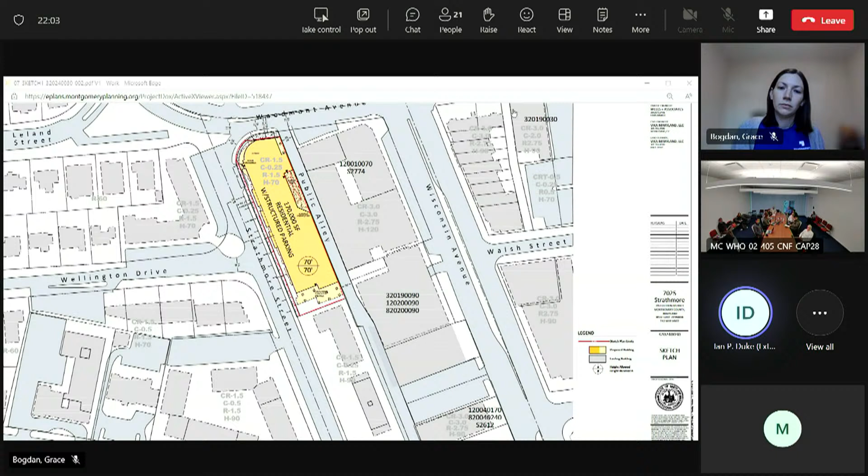We did have several things on the DOT letter that we wanted to bring up as well. The truncation, I'm assuming that means at the corner where the alley meets Woodmont. Well, I think that's what the Strathmore DOT does too, right? Yes. You don't have to truncate at the alley. I didn't think so. No, it would be where Strathmore and Woodmont meet. Yeah, that would be my understanding too. But if we ran both of those property lines out, took 25 feet off, we'd be within that. Can you just show us? Yes, we'll do that.

And then absolutely the same thing we've been doing before with sight lines, showing that everything's adequate so that you can make good decisions as a motorist. Sure.

There was another comment regarding, I can't remember the terminology here, I guess it's on the north side of Woodmont where the diverter is. I think the comment was to make some adjustments to the diverter for the bikes. I don't think we have a problem with that, but initially we had talked with DOT, Matt Folden, and you, Katie, I see you in the room, to discuss the possibility of full movement, which the applicant was interested in initially, trying to gain a little bit more access to and from this site.

I know that's probably going to be difficult, and I know what the sector plan recommends is an enhanced intersection here, with DOT working through the separated bike lanes on the north side, and then the bike share, which is just to our northwest, in combination with the limited turning movements for vehicles. I don't know that there's really much else we can do in the way of an enhanced intersection at this location. That's okay. Ian, I think we just wanted to review it. Yeah, I'm sorry.

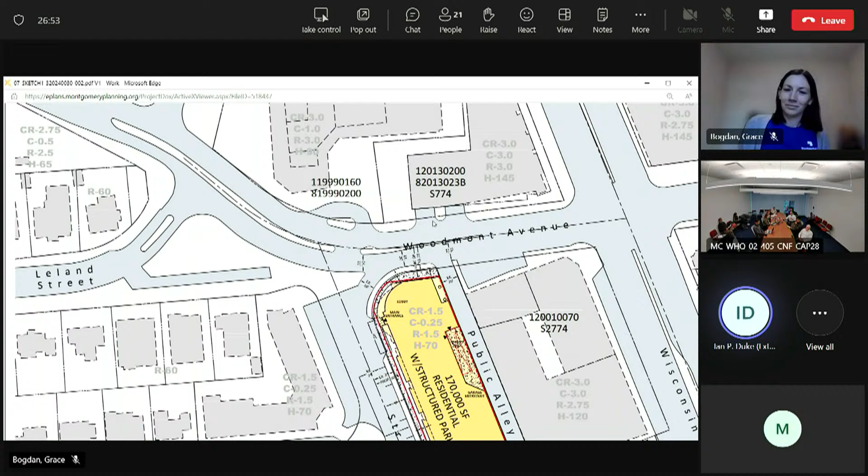Which is why we love sketch plans. So I guess really probably the largest thing is addressing the comments both from planning and DOT regarding the alley width. And then I've got one more thing that we wanted to bring up regarding schedule.

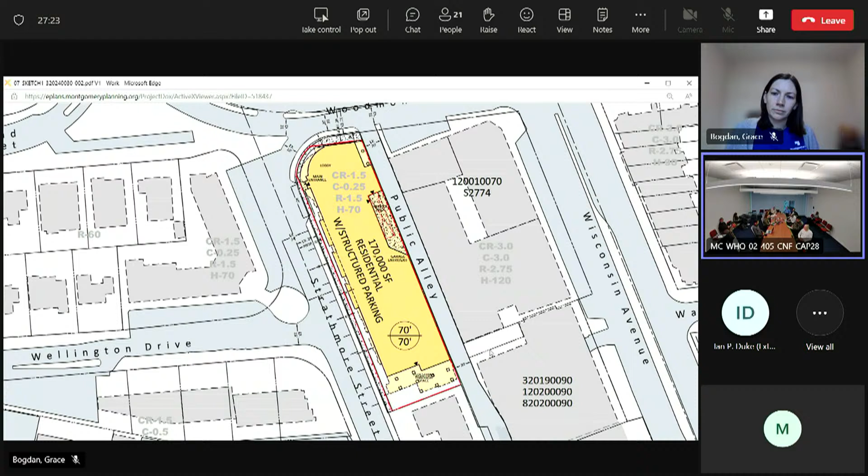Okay, yeah, let's talk alley really quick, and I'll start and then I'm going to hand it off to Deepak. So we have a similar concern. The public alley is 20 feet. You're right, we like the alley in concept, but we want to make sure that this is the safest that we can achieve. We had a similar issue with 7,000 Wisconsin on the opposite side of the street that you guys are linking to with your through block connection. The buildings are right on the 20 feet. This isn't 20 feet with some wiggle room and space. This is truly 20 feet, very tight.

We would like to direct you to do the same thing that 7,000 Wisconsin did, which is they gave an extra like 4.5 feet of pavement. The building cantilevers over, but it gives you a little bit more maneuver space, and we would like to see the same treatment here. So you're effectively widening it along where your access would be so that the vehicles can actually make a more comfortable, forgiving maneuver. Is that fair, Deepak? Is that where you're at?

And also, if you look at the alley right now, the effective width is not 20 feet. That is also a concern. And the way you have the access angled, and this alley being two-way, I don't know how cars are gonna make that yield with 20 feet coming out. And the amount of traffic, this being the primary access, and 7,000 also having a primary access on this alley. This alley is going to see more traffic than usual. So that was a concern.

Sure, and I understand your comments, Deepak. The two things that I'll say about that alley are, it's 20 feet wide, which is the minimum width for two-way traffic. We'd envisioned cars would be coming south on that alley to go into the garage, and then they would be going north out of the alley to Woodmont. That's one. The second was, you'd mentioned other elements within that alley that make movements difficult. It sounds to me a little bit more like an enforcement issue. I don't know that those things are allowed to be in the alley, and we certainly don't control those.

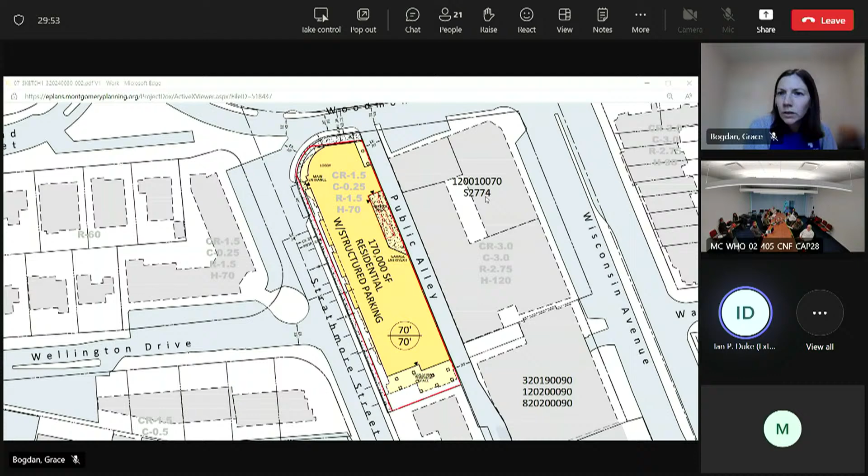I might steal it from Grace first. Yeah, we can certainly look up the plans, but just for us to review and understand what we might be faced with, what floor did the overhang start at for 7,000? Second floor, I can double check, but I think it's the second floor. To understand how much clearance was provided. Katie, do you want me to share? Oh, yes, please. I think it's arch 20.

Sight distance to garage access. I don't think that you can see. The way it's angled, it's gonna be tough to get access. We don't intend to make a U-turn. We intend cars to go out north. Especially the cars coming, there's no way you're seeing. What if they don't want to go north? They have to. Then they'll make a 20-point turn.

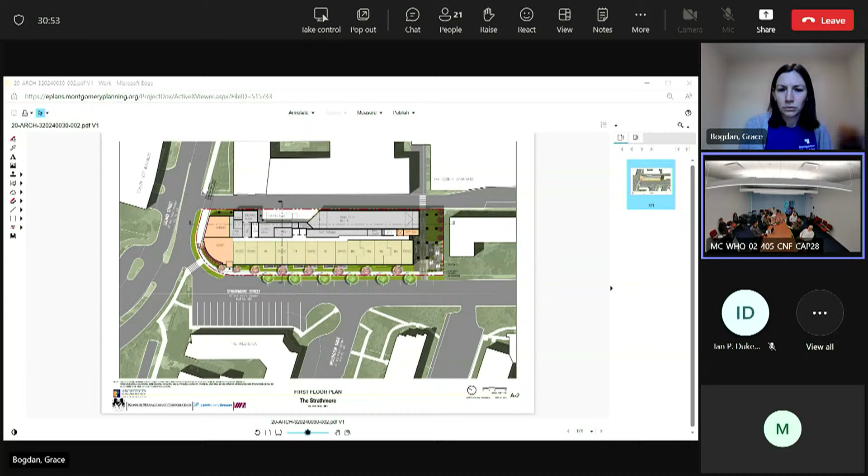Even northbound, how are you seeing the vehicles coming from the other side? There's absolutely zero sight distance there. That angle is not gonna work. Well, we can't turn it 90 degrees to the alley. We do have a truncation requirement even on the garage accesses. You have to truncate on the garage access so you can see. But you're saying maybe you could readjust it to a 90-degree angle instead? We can make it 90 degrees, but it will not improve it. That's why we angled it and just bit the bullet and said, okay, we're gonna bring people in from the north side.

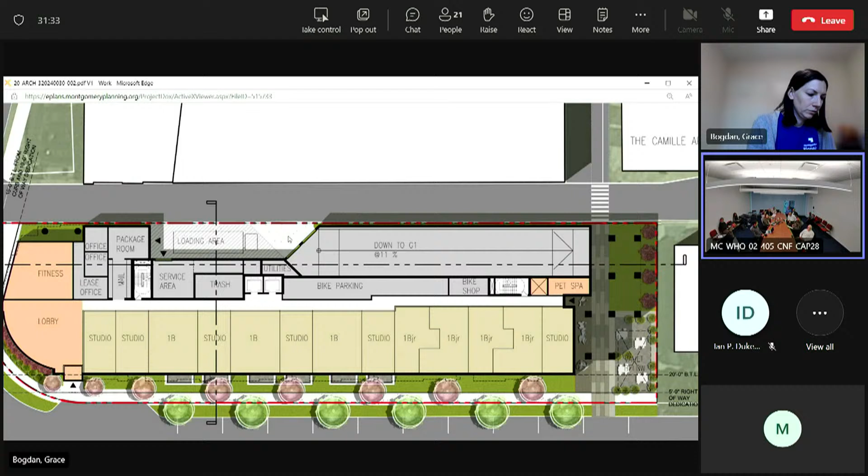Yeah, but what about going up? Same thing. Yeah, leave out to the north. You go up north. If you need to go south, you take Wisconsin. So, I mean, it's not really pleasant to go down south on the alley. Heading northbound. How are they gonna see the vehicles heading northbound when you come out the garage? Your side view mirror. That's not.

I mean, we can have clear sight distance. We can open the side wall of the garage, and that can be just on columns. We'll just fence it off, just make sure it's secure. It doesn't have to be a wall.

That sounds encouraging. Thank you for working with us. I think that sounds good. If we can get a sight distance analysis for that, that would be helpful. And I know that this isn't typically required at sketch plan. We can wait till preliminary plan if that's a more appropriate time. But getting truck turning templates, and I think also Deepak, this is probably why you're here too, has asked for an understanding of how the cars are going to move and volumes and things like that. That would all tie well together.

And then, I'm sorry, one other question. Just to confirm, what design vehicle? Is that an SU30? Is that what you guys are looking at, or what are you thinking? Yeah, something like that. Okay, so let's confirm that as well. I think that'll help with the evaluation. So you need to show the truck going around the 90-degree.

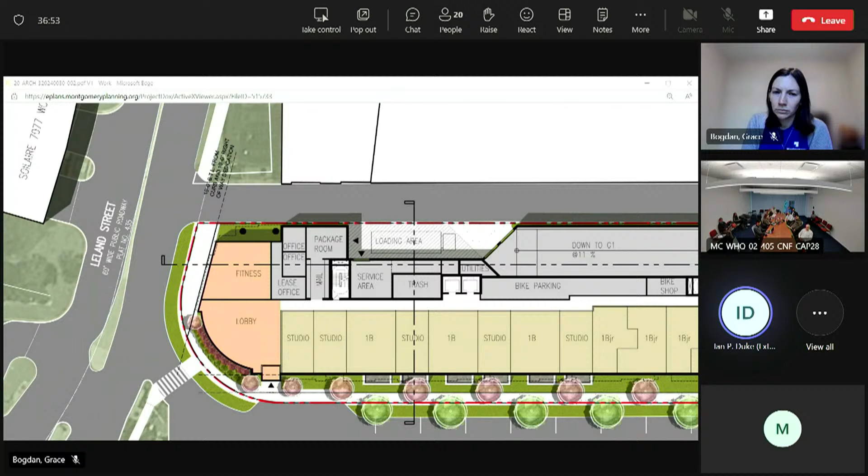Oh, well, so right, so I don't really want it right directly in front of your lobby. It's for everybody's use unless you want to go through a franchise agreement. Well, and I think the other issue too is the functional distance of the intersection. I think Deepak quoted you on what the minimum distance is where we can have parked cars. That is code, I think I mentioned the code as well in there. Yeah. So you cannot have parking within 35 feet of the intersection. The 35 feet from the travelway.

Measured from what point? Measured from, I think it's from the PI. You have to work with Mark on that, how we measure them. It's usually from the point of tangent, right? Usually it's measured from the top. I don't know how they measure. You probably have to work with traffic, how they measure it, where they measure it. It's 35 feet from the intersection.

Basically that one, as well as the street coming in the middle, that as well, not have parking. Right. In line with that. Yes. Some of the parking might go away. Again, that can be worked out at the permit stage or working with Mark on signing and marking, but some of those parking spots. That seems like it's contrary to what Complete Streets says for one of the options for these drop-off spaces.

No, you can put a drop-off space on your property, but what I don't want is it to be in front of your lobby, like we have with the project on Woodlawn Avenue, who thinks that that's their loading space. This is for anybody's use. Right. And it'll be showing short-term parking or something like that. It's not for loading and drop-off, so anybody can use that space.

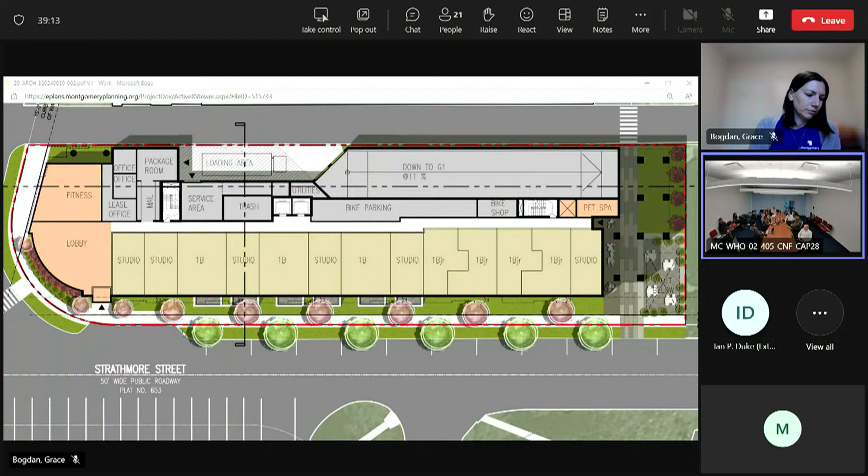You can't use the public right-of-way for your private use, unless you want to go through a franchise agreement. That's where I'm coming from. I think that's understood. Yeah. It's an open space, it's in the public right-of-way. There's standing allowed, but no parking allowed.

I'm just talking about the Complete Streets standard that recommends you have that drop-off zone at the beginning of the block, at the end of the block, or the third alternative is the center of it. So I just want to make sure that because of this odd situation where we're turning right, basically a free right kind of movement, so different than a typical intersection, that we can find where the parking can start safely.

Right? Right. It's determining how far up you can put your parking on that side. So maybe you could look at the sight distance from where the stop bar might be for the right turn and where that sight distance line is.

Maybe that's where you could get your first parking space so that it's in line by the time you hit the tangent. Right. Does that make sense? I think it wouldn't make sense to have 50 feet of curb before you get to the stop bar. Well, and that's probably why Rebecca was correcting me.

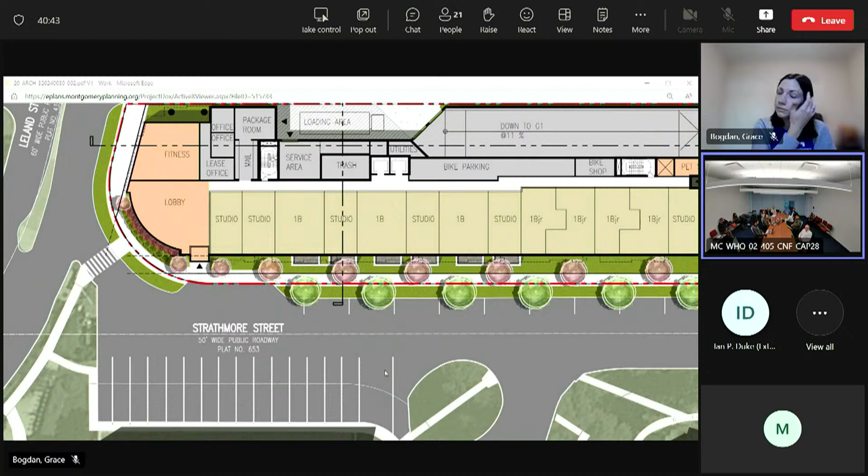So what I recommend, I think you're on the right track. I would reach out to Mark Terry and figure out exactly where it can go. At the permit stage, I just wanted to put it out that there'll be some parking spots. Yeah, so all this parking that you show on your set in the roadway is not approved. It's approved through signing and marking, so if you can remove that, then they will determine where they put parking spaces. We generally don't allow them within intersections.

And you can see here, there's another intersection right there. That's another point that I think Deepak was making in his comments, yeah. So you probably could move it down a little bit, like where your first tree is or something like that. Have it there. Okay. That makes sense. I know we're here at 10 o'clock, just to tick over.

The last question that I had was regarding schedule. If you look at the published sketch plan schedule, it has us doing our final submission on December 25th. I don't know that anybody's going to be around to be able to submit something on December 25th. Is there any float in the schedule for us to be able to stay on track? Please.

Yeah, so with sketch plan, it depends on the project. We hope that there's only one resubmission, not two. But if there is going to be a second resubmission, you would need to do that before the holidays if you want to stay on track, because the hearing date for this one is January 25th. So there's no way that we could push it till after the holidays. We'll make sure we nail it with the first one then.

Cool. Would you like to walk through the schedule? I know it's the juiciest details. Yeah, that would be great. Cool. Planning board date on January 25th. So your first resubmission is due by December 6th, with agency letters actually supposed to be due on December 26th. So that would probably be the most difficult date.

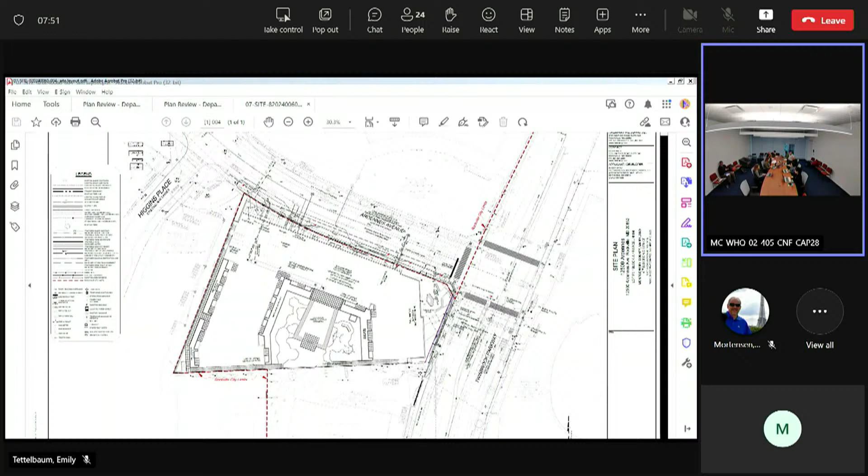So I'd say probably the more time-sensitive comments have to do with the TIS. So I think you all are pretty close to having that finalized. If you want to talk about it here, ask any question, that's probably the most kind of time-sensitive review we're looking at now. So we're happy to answer any of your questions about any of the comments.

Okay, great, thank you. So just for the record, my name is Jane Mahaffey, working with Fairstead on this project. And we have with our team Rob Bernard from Fairstead, who's to my left. You guys all know Matt Gordon. I think online we have Valerie Hockman from SK&I, Kevin Mack from Dewberry. I saw Trini. I can't read all that far away, but it's Trini Rodriguez and maybe Steve from Parker Rodriguez and Nancy Randall

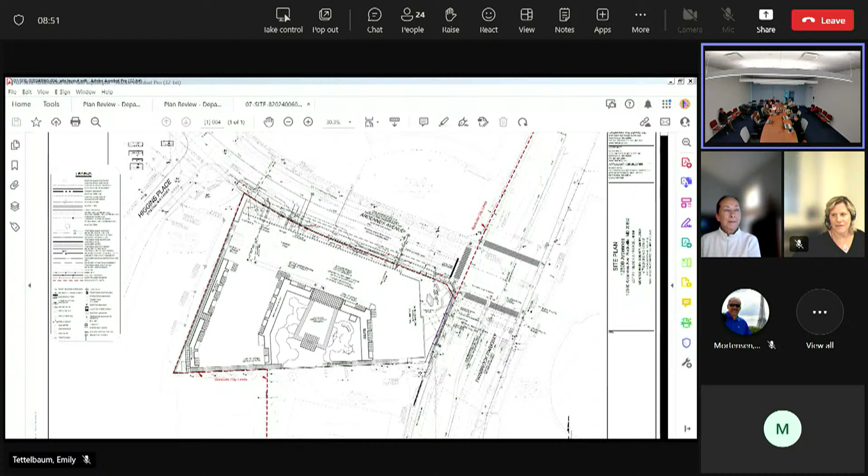from Wells. So maybe since you started with the TIS, maybe have Nancy just give a summary of where we are. We have had some initial conversations with Richard relative to the initial review coming back out and our group. So Nancy, why don't you just go through and ask a couple of questions that we did have relative to that. Yeah, Richard, we understand the majority of your questions that you had. We're going to resubmit that.

The main question I have is based on a meeting that I had recently with NAIOP and staff with regards to Vision Zero. You had asked for some recommendations with regards to the speeding issue, and we were told in that NAIOP meeting that maybe we shouldn't be addressing that in the traffic impact study. So I just wanted to maybe call you back and get some clarification on that if I misunderstood what was stated. I think generally we're in good shape, but if I could schedule some time with you to go over that question. And I think there was one other, and I apologize, Jane, I don't recall what it was. I'm sorry. All right, give me a minute.

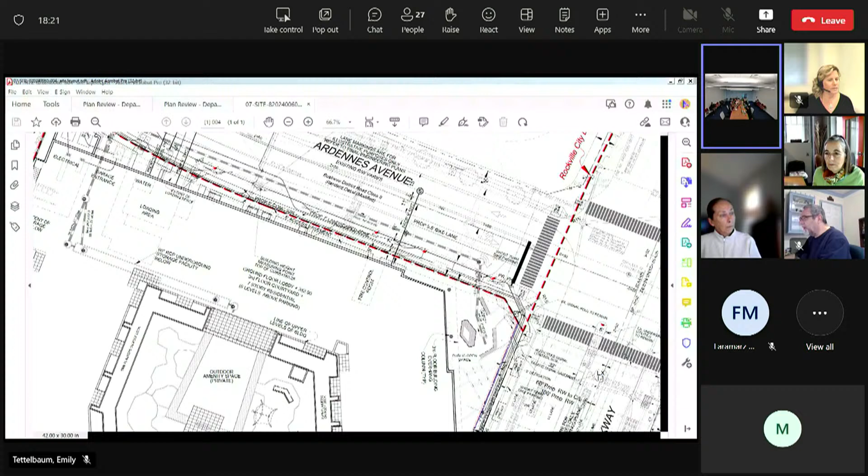I think that 100 feet was like a goal, but you don't have to strictly abide by it. Your suggestion of moving it back so it doesn't conflict with the right turn lane and where the bike lane is merging, we're okay with that. As a matter of fact, if you can show anywhere along your property frontage, obviously as close and convenient as possible is good, but you can move it back from the intersection as far as you need to provide a safe drop off for us. Okay, we're looking to see if we can do that. I just knew we couldn't do it within the 100 feet of the entrance because we have the right turn lanes. So Kevin, do you have any other questions related to that while we have them on the phone?

No, because it's actually 108 feet from the door; that's the end of the taper for the right turn lane. So we would stripe off that portion between the loading dock and the taper, and we'll designate those two parking spaces as short-term loading, whatever you prefer to designate those as.

My understanding was, looking at the plan, and maybe Jim Lapping can help me, I thought based on your exhibit for Ardennes, you would not have any on-street parking at all. And if you wanted to do the loading up to where it says loading and your driveway to the parking garage, I thought you don't have any on-street parking. And if you want to do that, you have to cut into the landscape buffer. Am I wrong on that?

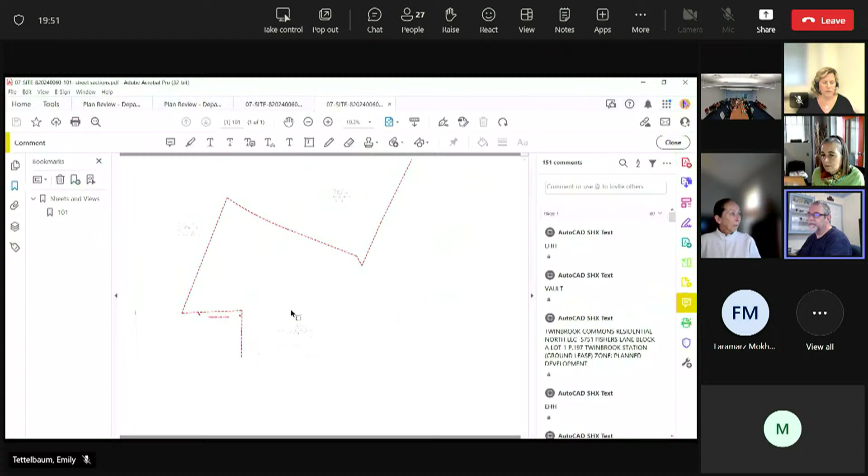No, there's a 7.5 foot wide parking lane against the curb for a portion of the frontage where we don't have conflict with other site elements. So between Higgins Place and our garage entrance, there's room for parking for a few spaces there, and then between the loading dock and the garage entrance, that curb lane is actually part of the fire lane. And then we have space for two parking spaces between the loading dock and the taper for the right turn lane.

And we didn't see the second cross section, so that's fine. If you have room, then it's okay. I just looked at the one, your section BB, and we didn't see any room, and I thought that was your typical frontage. Oh yeah, it's labeled on there as turn lane, and it should be turn lane / parking lane. Yeah. Okay. I see the confusion there. Okay. So that may be able to be satisfied with just a little bit farther back. So we'll show that on the plan.

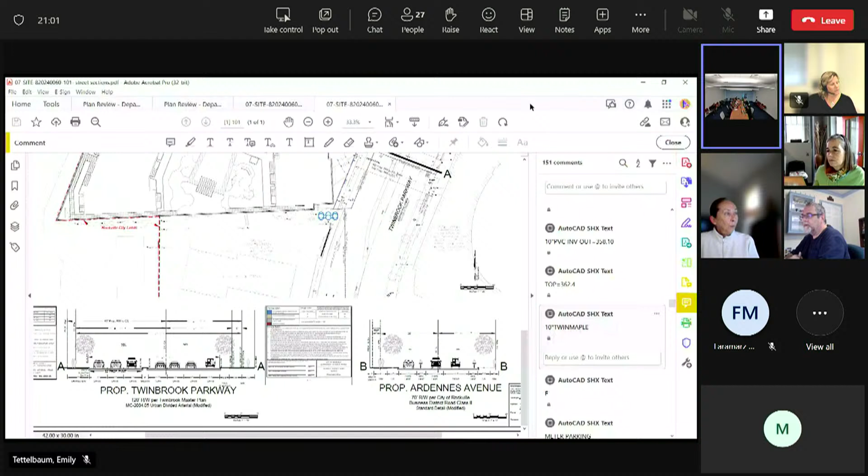And then I think our big one, obviously still to work out, is the trash and loading, but we'll do the turning templates for that to show coming in, and we're tweaking it a little bit interior to help out with the discussion. So I think we'll have something hopefully we can show you in the next round that will satisfy those three requirements. And thank you for the consideration of the 8 foot from the previous project.

Appreciate that. Absolutely. On a side note, I remember we had a development in the city and we had the same speeding issue. And what we asked the applicant, and our mayor and council approved that, was to mount the speed display boards on the side of the road to inform drivers that they're speeding. So that was the mitigation measure that we applied, when it went over the speed limit. So just for your information. Okay. Thank you.

Okay. I think Rebecca, relative to some of the things that were in the previous report, somebody noted a 2019 letter from the last one. We'll just go through that. I don't think there was anything. Twinbrook, you asked for the bike lanes. Twinbrook clearly isn't going to have. Yeah, did you guys pay? The previous owners, we weren't the owners on the last round. The previous people had a pay in lieu for the bike lane. So I think that's probably going to be the only way we're gonna satisfy that one.

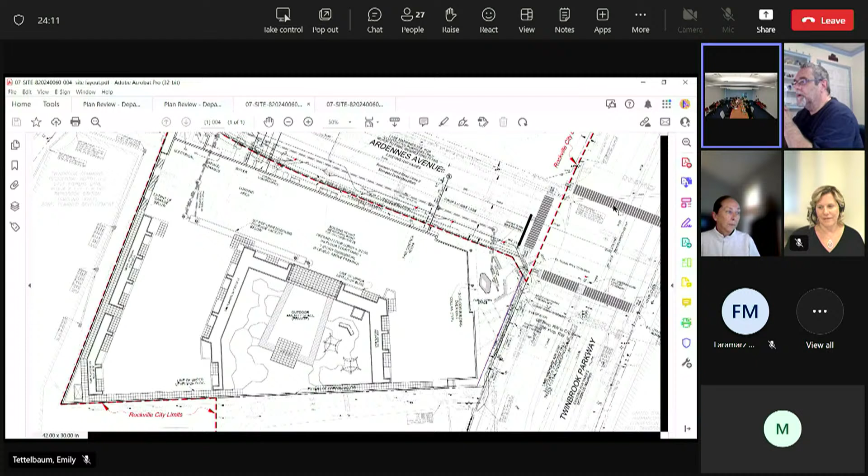So you can't have steps, or is there an easement there too? Where? Along Twinbrook Parkway? Does everything fit within the right of way or do we need an easement? We've designed everything to be within the right of way. But that doesn't have any space for the bikeway, is the problem. But the sidewalk, anything that's required to be in the right of way, that's public. Yeah, the 8-foot bike shared space sidewalk. The 8-foot sidewalk and the 5-foot tree pit are within the right of way.

We are showing a 1-foot PIE. You're only getting minor species, simply because the sidewalk is right on the right of way line. Because anything less than 6 feet, we can't put major species trees in. I don't know what trees they have proposed there. Trini or Kevin, do you know what trees are in the Twinbrook Parkway lawn panel? Hold on a second here. Let me grab that.

We're having them do an amended soil in sidewalk. This we have with Parker Rodriguez: we have American elms, hybrid elms, which is a big tree. I want to talk about that because I don't know what the speed limit is on Twinbrook Parkway. Is it 40? Nancy, do you know what the speed limit is on Twinbrook? I thought it was 35 there. Yeah, I believe it's 35. Okay.

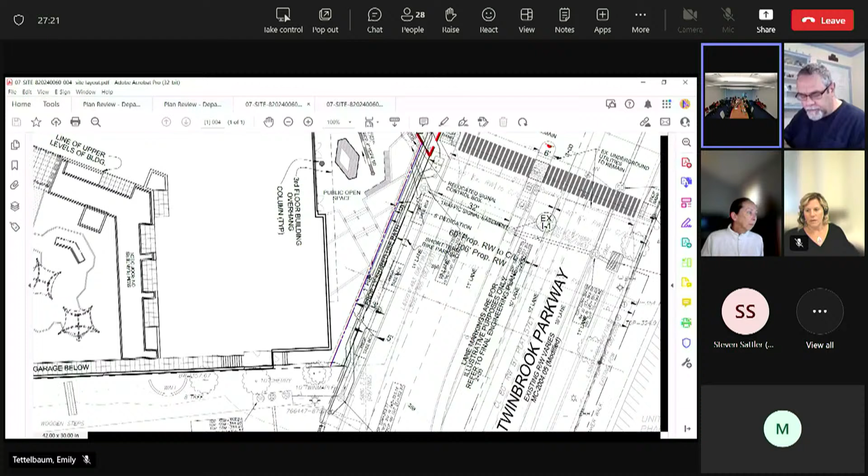Is that why Sam Farhadi said he wants us to follow the 1992 Bethesda streetscape standards? Different issue. Sam's not on today, I think he's away, but I heard from him yesterday and he said it's because those streetscape guidelines have an amended soil panel under the sidewalk. That's correct. What'd you say? Amended soil panel is the correct way to do it. Right, under the sidewalk.

Yime, do you know if we allow the major species trees in a 5-foot tree lawn? I think that will be at the permit stage and the tree guy will review it, but it doesn't matter which one, they need the soil panel. Okay, and if you're following the panel, that's 5 feet, so you should be able to put the larger trees, because the soil goes under the sidewalk. That's the whole point. Depending on what the speed is, you need more buffer so vehicles don't run off the road and hit the tree.

Okay, so where do we learn this? She said at permit stage, I think, right? But we need to get it nailed down. Can you provide some guidance on what you want? At this point, it's whatever you guys want, isn't it? Sam's out, we can determine when he comes back. Okay, and if you just want to tell us what tree you want, we'll put it in. I don't care, I'm not going into that. I meant if you want the smaller or the larger. I know that there was something like 4 feet and 40 miles per hour that we wouldn't allow. So I don't know.

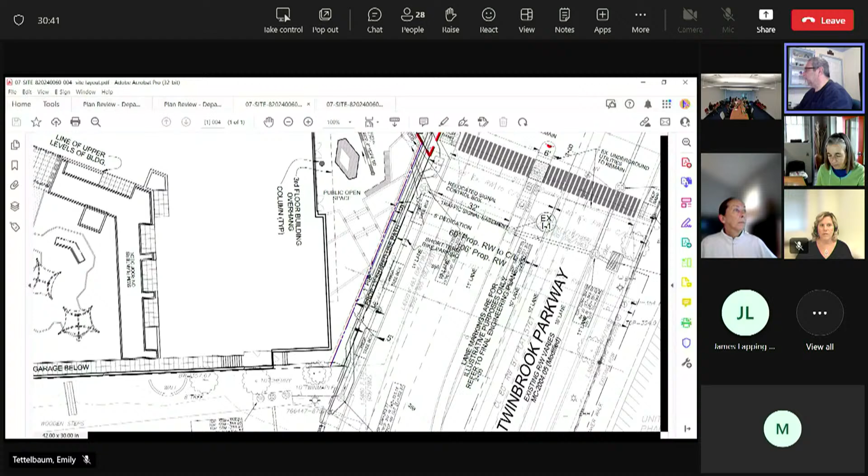I'm okay unless they have questions. I think it was pretty straightforward. I guess the only question I would have on that is you want us to take the pipe coming out of the garage also straight across the road? Because we basically have two pipes that are creating the parallel system. One is the drainage from the courtyard at the intersection, and then the other one is the drainage from the

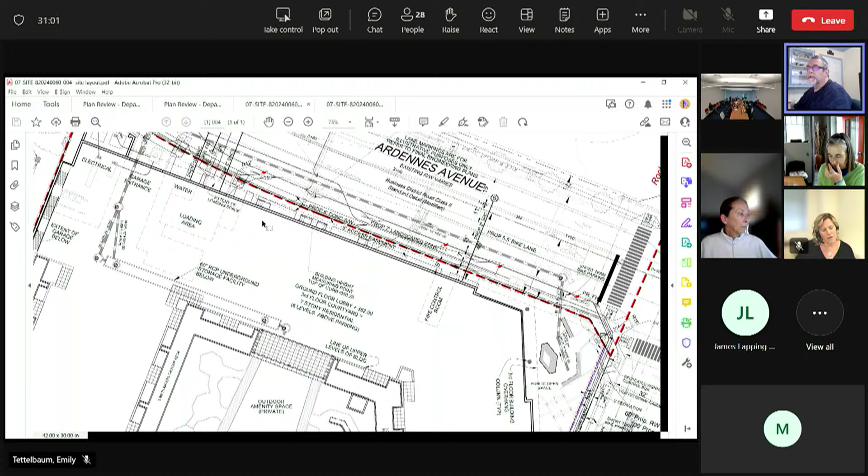building itself. One of the issues we're running into is that the storm drain system in Ardennes is very shallow, and it's inhibiting our storage volumes for the stormwater management. So I would need to look and see what the depth of the pipe across the street is. I haven't. That's fine. If you can provide justification to provide a parallel system, that's fine. But okay, just looking at it, I thought it could tie out.

And so if the stormwater vault, the pipe coming out of the garage is lower, I think going down to the inlet you proposed, the existing inlet I2 would be fine, since that's probably close to the same distance as crossing the road. It would really just be the long run, running parallel from I guess the south part of the development.

Sure. Okay. All right. And I don't believe that the drainage from the courtyard would be an issue for getting into the pipe across the street. Okay. But we'll have to take a look at that and make sure all the inverts are working in our favor. Okay, sounds good. All right. Yeah, that's easy. We'll deal with that one.

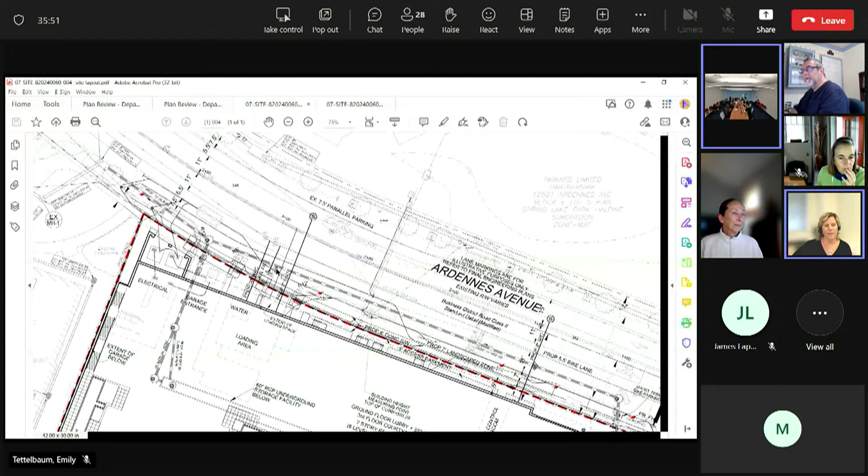Yeah, proposed back in 2019, so I put them side by side, and there was more fenestration, Valerie, on the previous elevation on that corner, especially on the northwest corner. On the northwest corner, there's a blank wall where your electrical room is. Right. That is very exposed for pedestrians walking on the sidewalk. So that's the side where I think previously there was some fenestration, but now it's completely blank. So if it's feasible to have fenestration, it's better.

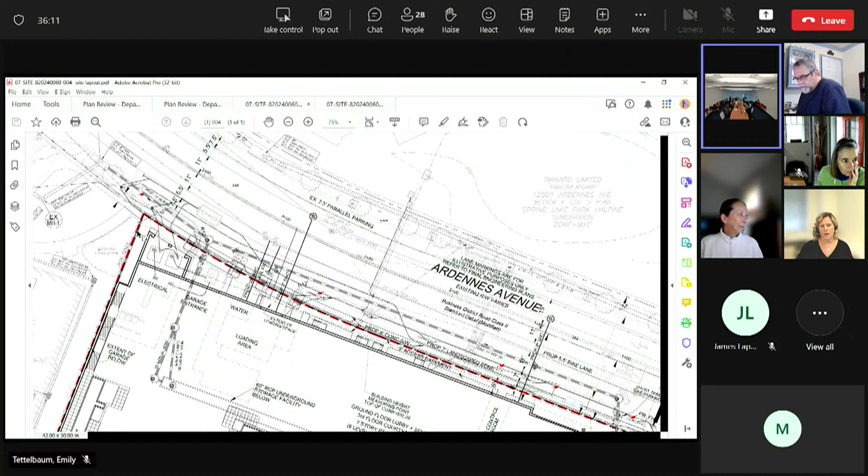If not, some sort of artistic, like a brick pattern or whatever you guys come up with, should solve the problem. Yeah, I think we're leaning towards more brick pattern or some kind of relief, like in and out kind of. Yeah, so if you give us a little detail rendering for that corner, we can take a look at it. Yeah, we're going to try to solve it in a way that doesn't cost more money.

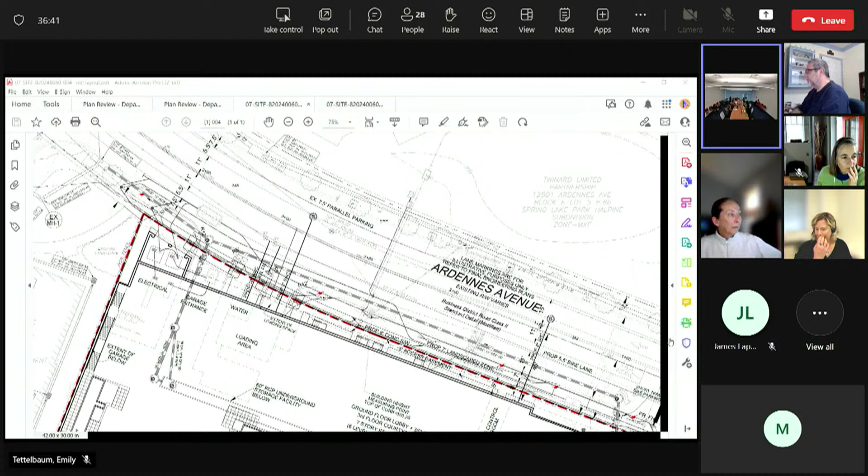Sure. All right, we need to wrap up. Yeah. Good. That was my last comment. Great. We'll just coordinate with Emily on our submission. The updated TIS is going to go in quickly, but the rest of it, we may just try to make one clean submission before December 26th. Okay. We'll talk to you about that. Yeah. Sure. All right. Thank you, everybody. Great. Thank you.

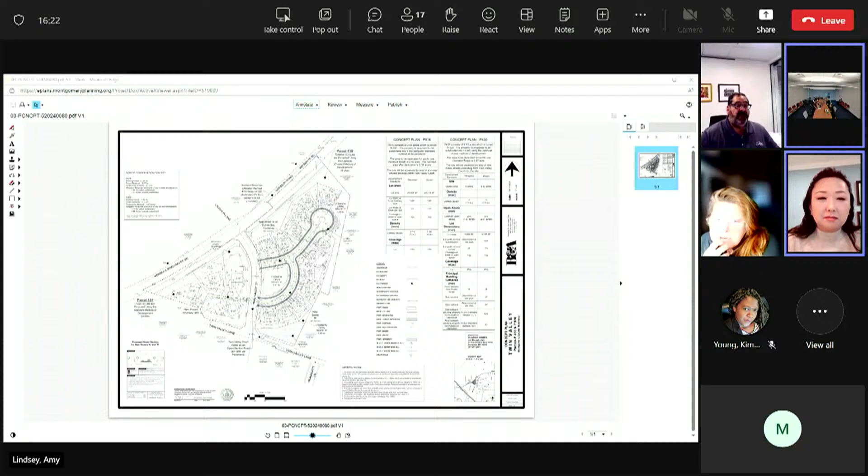Well, I've got the plan up, but I was waiting to hear from Christina. Can you guys hear us now? Can you hear us? Yes, I can hear you. You can hear us now. Who can hear? Can anybody hear? I can hear you, Paul Mortensen. Okay. And Amy, can you hear us? Yes, I can hear you now. Oh, okay. So it was a glitch. Okay, so we can start again. I guess I need to start again because I'm not sure what the auditorium heard.

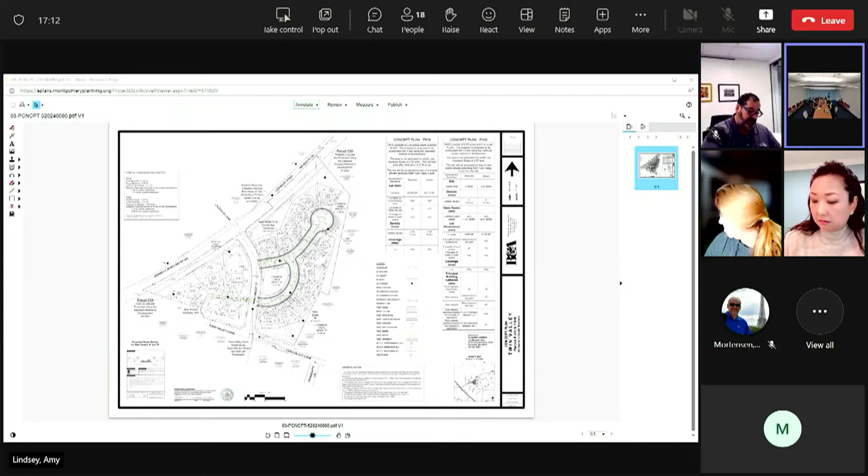I am Christina Sorrento. I'm the Chief of the Intake and Regulatory Coordination Division, and this is the DRC meeting for Twin Valley. Your lead reviewer is Amy Lindsey, and she's going to highlight any of the major issues, and then we'll turn it over to the applicant. This meeting is being live streamed and recorded. Go ahead, Amy. Thank you. So just to highlight a couple of the main issues. The first is that you are proposing to use the R200 cluster method on the northern parcel.

I do not recommend this for a cluster method, because the cluster method in this zone is really for the preservation of environmental features or the creation of open space. And while this does create open space, the vast majority of it is not usable and is just located between two houses. Additionally, it doesn't meet the minimum retention requirements in forest conservation law. So it really doesn't meet the intent of the R200 cluster.

There are also, if you look at our transportation planner Richard Brockmeyer's comments and DOT comments, we tried to be comprehensive, but they talk about all of the frontage improvements, which is one of the major questions you were asking, because this does have frontage on Norbeck Road, on Twin Valley Court, and then on Twin Valley Lane itself. There are a lot of frontage improvements that would be required. So with that, I'll turn it over to the applicant.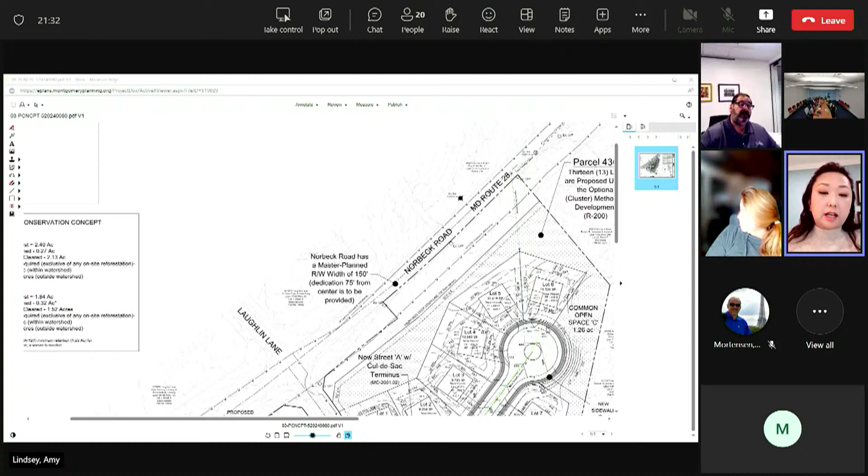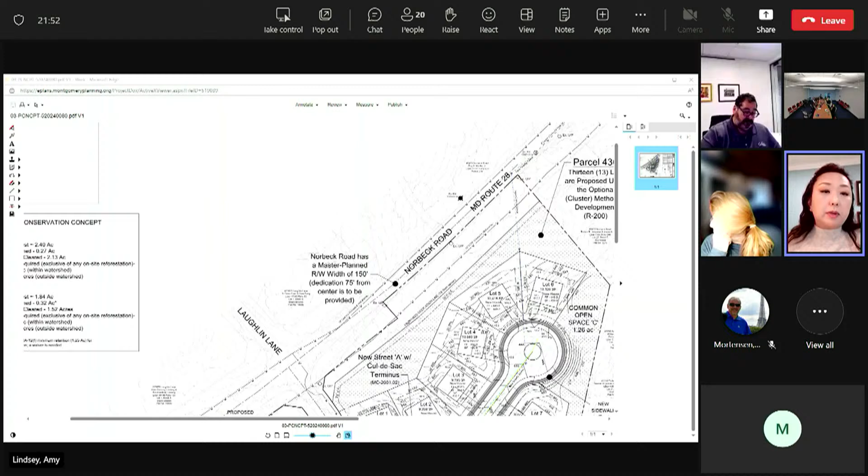And so I'd like to get a better sense of Norbeck Road. Can we show the plan a little bit? The reason we did the cul-de-sac, my understanding is that there really is a significant grade change from the site up to Norbeck that wouldn't make another secondary connection, aside from the existing Twin Valley Court, really feasible for this small project. And so we really think that the cul-de-sac is the only option to yield any type of feasible development on this property. So maybe we start with that, to understand if that is something that we can work with.

I would agree that the grade here is substantial, and that is creating some issues, and it's unfortunate because this is the portion of the property that is forested, whereas the portion up here is not forested. And so the forest is where you would more likely want your development to go. But I don't think, correct me if I'm wrong, that changes the requirements for frontage improvements along Norbeck Road.

Okay. For Norbeck, from what I see, the master plan calls for a bike path on the other side, so we weren't expecting anything on our side, I guess. Per the Complete Streets Design Guide, I think it's a boulevard, if I remember rightly. Right. There are frontage requirements. There is a planned side path on the opposite side of the road, but there's still frontage improvements that would be required on Norbeck on this side as well. I believe I put them in my comments. Let me pull that up. The tree lawn. Yeah. Sidewalk, right?

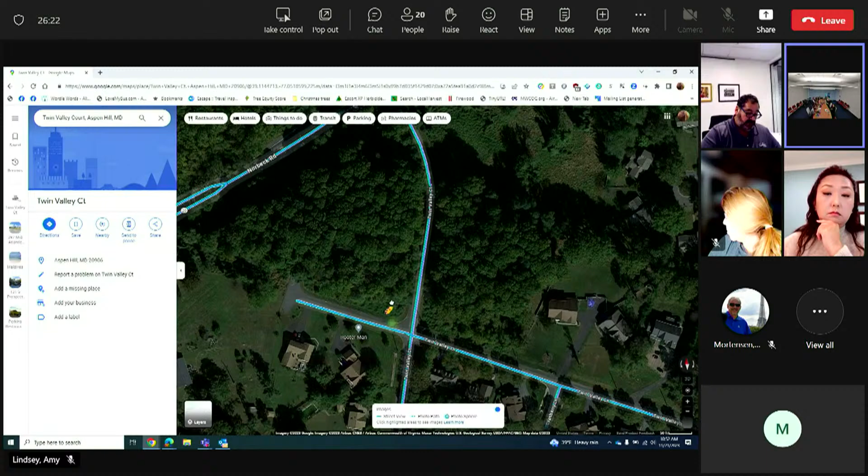So maybe get back to the 74-foot right of way we were talking about. So the interesting thing was, complete streets really doesn't address open section roads. So when we ask for a wider right of way, it's usually to accommodate that swale and then the sidewalk. Some places they haven't put in sidewalk; I don't think this is the case where you wouldn't put sidewalk on both sides of the street. It could be potentially 74 feet. It is reduced from the 78 feet, which is basically a secondary residential street open road section.

You can go back to the 2000s, the 1000s standards that are on the website to look at the swale. The swale, you have a 2-foot flat bottom. We need a shoulder of some sort. I'm not sure if it's paved, like 1 foot paved and then a 1 foot grass strip. And then the 74 feet is proposing a neighborhood yield street, and that is with parking. And so Marie would have to agree to that neighborhood yield street. It's basically what you can fit in within the right of way. And then you have to accommodate stormwater management. Right.

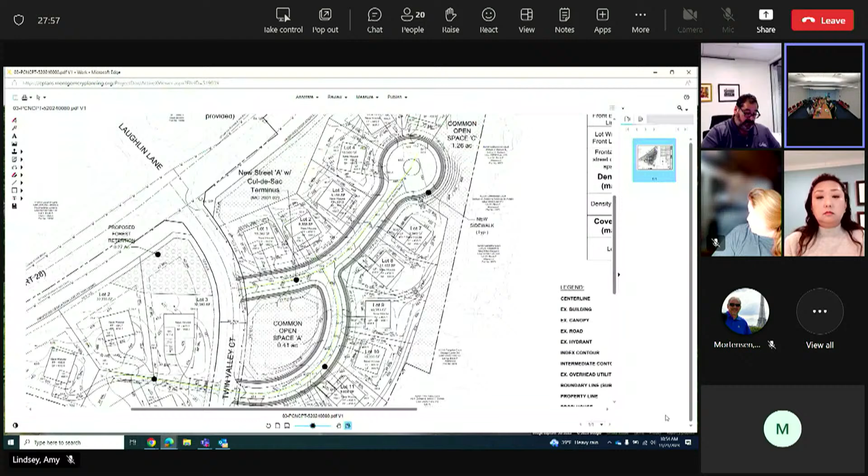So the parking is maybe on one side of the street, or maybe 28 feet of pavement is what I was coming up with, and 74 foot. Yeah. So if you look at the standards, they don't show parking. Yeah, 78 feet, and let me look at the 74 one. Okay. So the 74 one is without the parking. It's just 2 lanes. So it's 20 feet. So if you need parking, you're at basically 28 feet. Yeah, so it's kind of weird. We'd have to look at it again because the neighborhood yield street is to prioritize parking. So it would all depend on if Marie would allow that kind of street, and if not, then you'd have to go to a wider street.

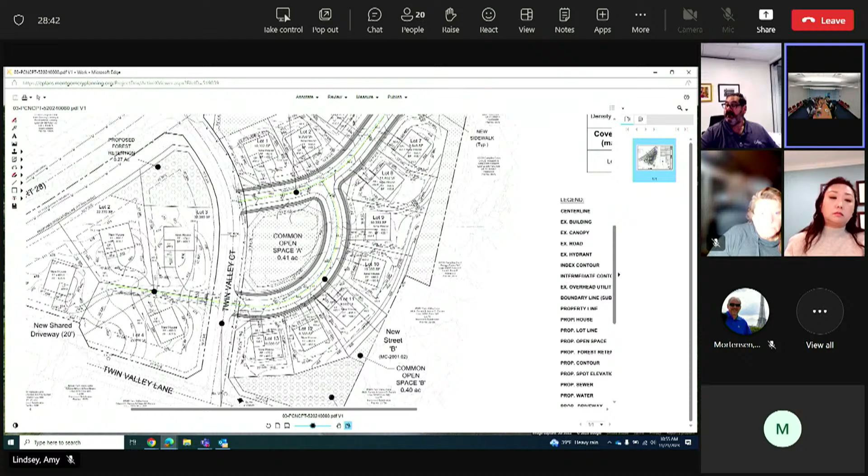Now, again, if you could fit less in the right of way, then we can take a look at it and figure it out. But usually the wider street is to accommodate the swale. Yeah, then you have to grade the swale out to see how wide of a right of way you need. Basically, if you can fit it in that lesser space, yes. That's within the 15 feet. Yeah, whatever space, edge of pavement to the sidewalk. Yeah, so you have to fit that swale in to grade it out. Yeah, and you can just go back to the old design standards. So.

And what are those radiuses over there? The horizontal radius, if it's a public street. So are you meeting the minimum requirements? We were for that type of street, tertiary street, yeah. And it probably can be 100. I don't think that'll be a problem. But if we go to the 74, then we have to at least make a waiver finding for it.

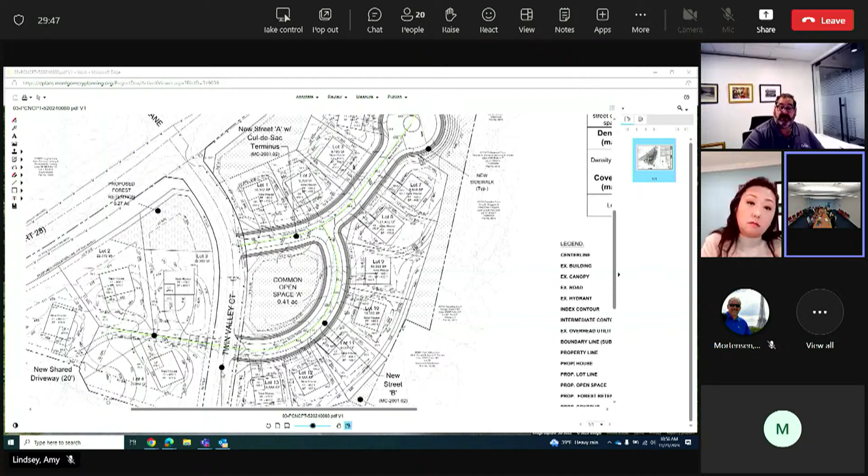Okay, so that would be the internal street. Then also we'd be dedicating for Twin Valley Court, I assume, on both sides. Yeah. To get to that 74 feet. So Twin Valley, we'd probably have to take a look at that road. There's very little there. There's 20 feet of pavement. There's no curb. There's really no ditch or anything on either side.

So what would you be looking at, Twin Valley Court, in terms of sidewalk? Is it master planned at all? I don't think so. Yeah, that probably looks like more of a secondary street. Yeah, it'd be a secondary. So you probably need a 78 foot, look at 78 foot of right of way.

And that sounds like a lot of right of way to me. I mean, is there any way to reduce that? It all comes down to the swale. Got to grade the swale in, try to figure it out.

I think we might have lost the conference room audio again, if you guys were talking. Can you hear us? Hello? I can hear you, Amy. I can hear fine. Can somebody say something? Oh, we lost them. No, we hear. Most of us can still hear the room. So Sue, I can still hear the conference room. Yeah, people can still hear us. I can't. We're being told our audio is fine, so it might be on their end. I think you're getting the comments. I'm getting the comment. Okay.

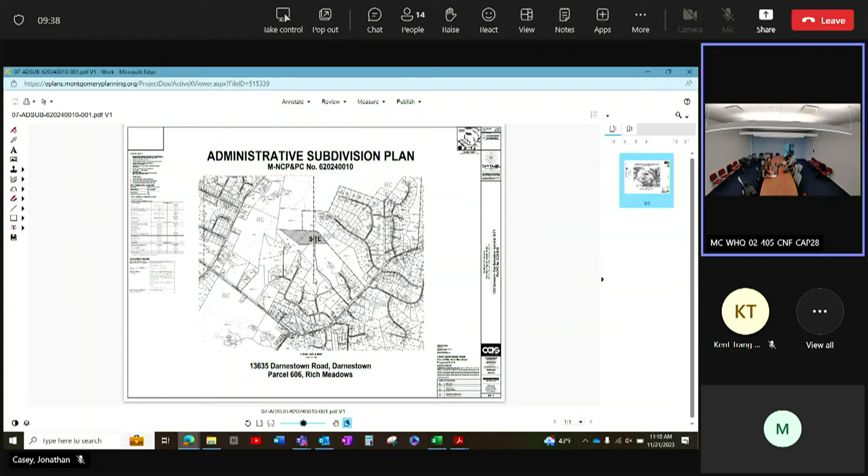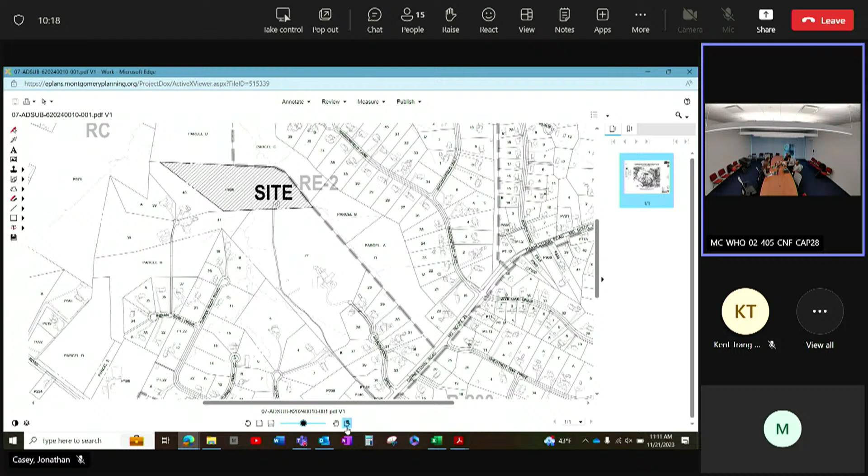Good morning, I'm Jonathan Casey. This is Rich Meadows. The subject property is located in Darnestown on the west side of Darnestown Road. It is kind of in the back of the existing lots off of Masonwood Drive. Jared, I just want to confirm that you received Josh Penn's forest conservation comments. I did, yes. Okay. So we really don't have a ton of big ticket items.

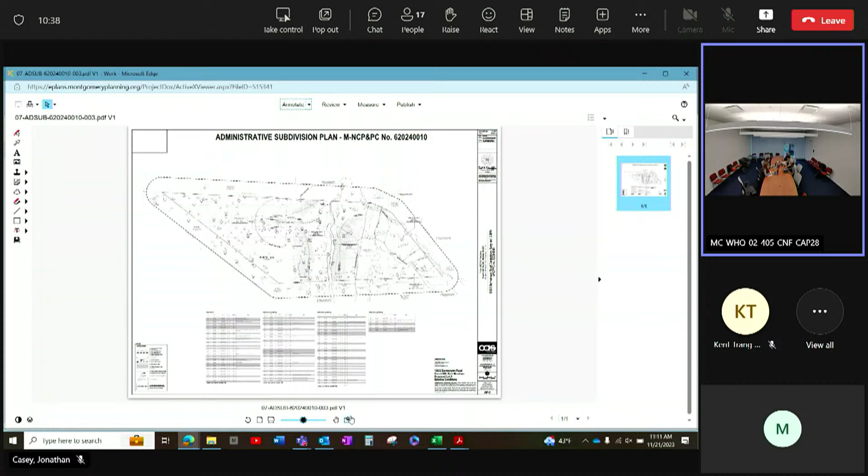The bigger issues came primarily from DPS regarding the placement of the pool and the accessory structure. There were a couple of questions about the stream buffer impact and how the stream was going to be crossed. But for the most part, there were not any major comments.

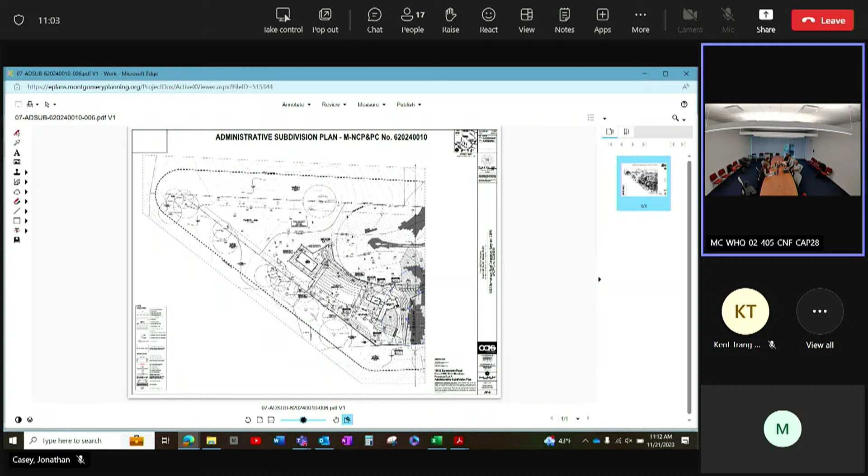So I will let the other reviewing agencies go around the horn, if we want to start with DOT. We didn't have any comments; this is a state road. Just turn over to the applicant. Okay. Jared, the meeting is yours. Great, thanks, Jonathan. Good morning, everyone. Jared Carhart with CAS Engineering. I'm here on behalf of the applicant, Kent Murphy and Trang Bui, who are also with us here.

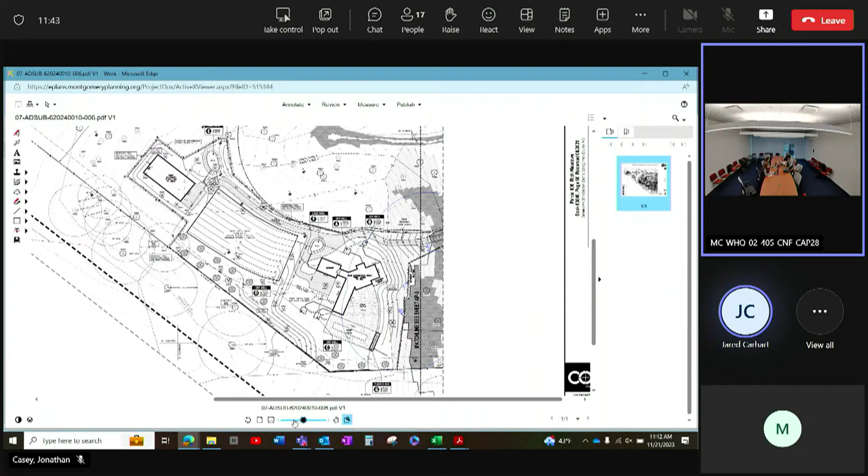So yeah, in regards to the stream buffer disturbance and the route that we've chosen, funny enough, we worked through that for over a year with Doug Johnson and finally came to an agreement on what we're showing on this plan. When I saw Josh was our environmental reviewer, I thought that was funny, but we have enough correspondence and emails to further justify why we have to go this route. So upon our resubmittal, we'll be sure to provide that additional clarification and information

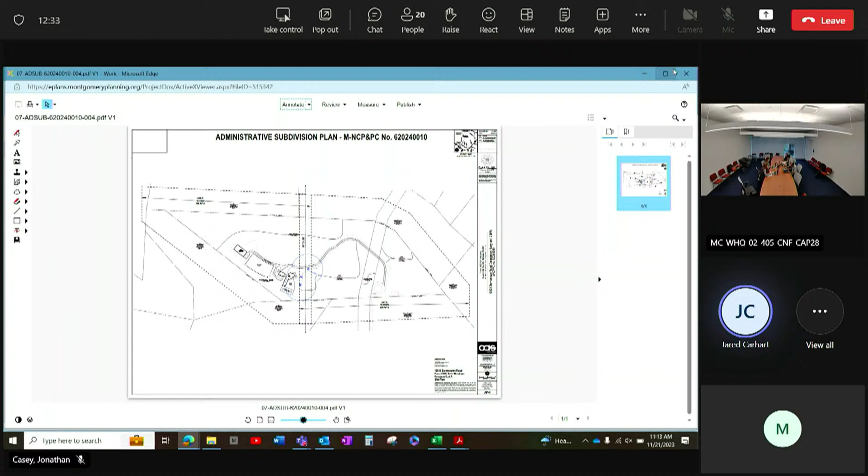to justify that. In regards to the accessory structure being more than 50%, we will reduce that in size to meet the zoning requirements. I did have a question for Matt from DPS zoning to see if he could either provide us with what he believes would be the rear yard determination or just something that can provide some additional clarification on what the rear yard is here, because this lot doesn't have any frontage, so it's not as entirely clear what the rear yard would be for a property like this. So having something like that will help us address that comment.

Okay, Melissa Gutos, can you help with that? Yeah, I'm filling in for Matt today. Matt Mikowski's on leave. This is Melissa Gutos with Plan Review and Zoning. We can definitely clarify that and send you our rear building line and rear yard determination. Great, thank you. Was there anything else you needed for that? That was it for the zoning. Yep. Okay, sounds good.

The other question that I had was going to be directed towards Josh Penn, if he's here. No, he is actually out on leave this week, but I can attempt to answer a question. Sure, yeah. So one of his comments was providing a detailed installation sheet for the driveway culvert that we will need to install. I was just hoping that he could provide a sample or a project in which he may have had experience reviewing something like that, just so that we can put something to him that's up to his standards.

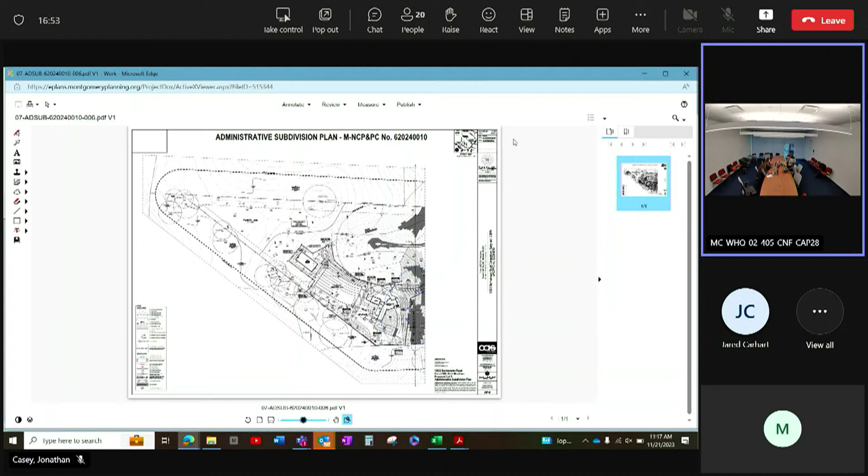To be honest, I can't give you a time right now. I can look at the schedule, and I want to talk to Josh about it. Okay. Also his input, because depending on the modification that he requested, there may be a little bit more research that needs to go in on your end, and I just don't want to give you a premature date. Okay. That's all I have. All right. Thank you very much. Thank you.

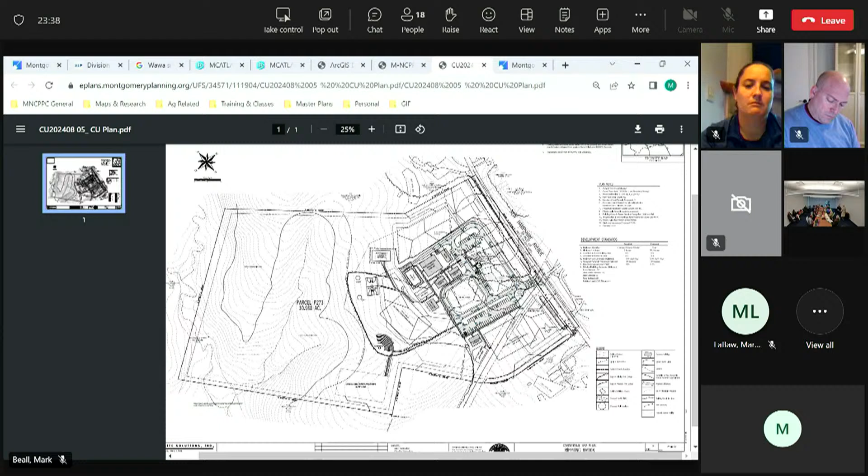If I had any questions about to what extent the forest conservation area could be used toward the educational program, I should be talking to Josh about that probably. Doug Johnson's going to be. Doug Johnson as well? Yeah. Okay. Kate Dodorian, if you can hear this and you're on the line, did you have any questions you wanted to ask of the DRC members? Just the questions you've already addressed at this point. Yeah, well, there's still a lot of information to come in, so we're not sure exactly where we are. We need to take a look with Roberto at that plan, since we're going to be changing things internally, but for the questions on the exterior, the information we got today helps.

Did anybody else have any questions? I guess just a general question. I know there's potentially going to be some additional comments coming in. Do we know when or who? For the forest conservation? Well, that, yeah. Right. At least for transportation, we got the transportation study. We've begun our review. It's going to take some time. I'll echo, I don't know if SHA is here. Their typical response time is 45 days from when they receive the submission. So I don't know where they are in that review, but it'll take a bit of time. Swayze, do you have any comment on that?

Yeah, so we are currently reviewing the traffic study. I believe our comments are due in early December, but I'll have to double check that. It might be earlier. I have to double check the due date of the comments. One thing I did notice, and I don't review the traffic studies myself, we have traffic reviewers that do that, but I was looking at the peak hour trips into the site, and based on that, I think a deceleration lane is going to be required. I'll have to wait to see what our comments are, but just based on the peak hour volume, it looks like that may be required.

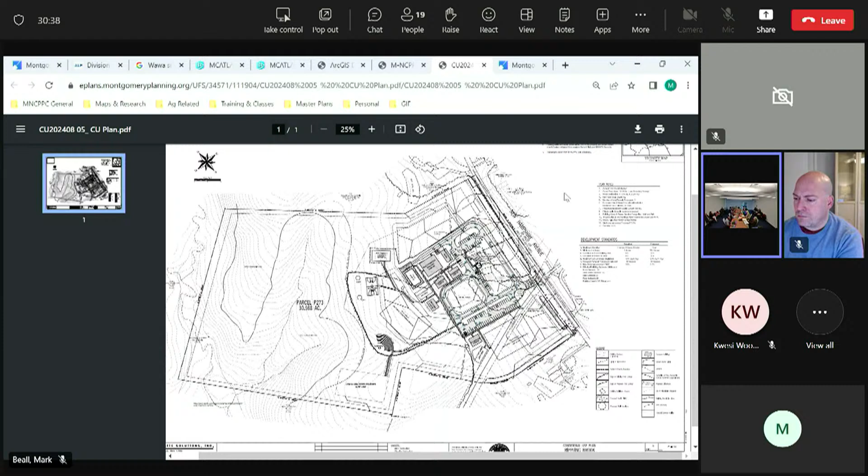Well, thank you. That's all the questions we had. We have a lot of work to do, that's for sure. And we'll be talking to some of your people individually. I'm looking forward to getting other comments from the other agencies. Okay. We're gonna follow up once you get those additional comments. All right. Okay. Thank you very much. Thank you.